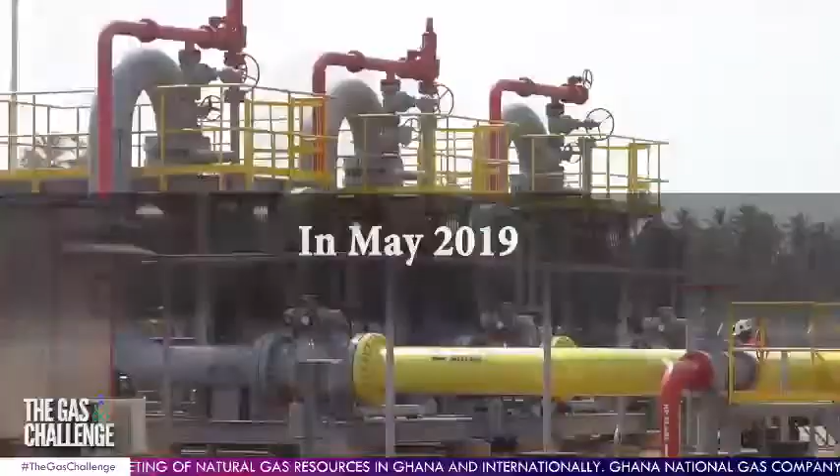In May 2019, the Government Relations Department of the Ghana Gas Company birthed an initiative that would ignite minds and fuel competitions. This is the Gas Challenge, a pioneering production designed to deepen the engagement and knowledge of Ghana's energy sector. The very first edition, dubbed the Stakeholder Edition, brought together key players in the gas industry. Institutions like the Ministry of Energy, the Energy Commission, the National Petroleum Authority, and even the Daily Graphic took part in the friendly but fierce competition. It was a battle of wits and knowledge, where the Ministry of Energy ultimately emerged victorious.

In 2019, the challenge evolved. The student edition was launched, pitting some of Ghana's top universities against each other. Universities offering courses related to the gas industry, such as the University of Ghana, Kwame Nkrumah University of Science and Technology, University of Mines and Technology, and others, faced off in an intellectually charged atmosphere.

This was no ordinary competition. It was a battle for supremacy in the energy sector. The competition, held across 3 major regions, Greater Accra, Kumasi, and the Western region, saw the University of Mines and Technology, UMAT, clinch the title in the very first student edition. For 3 consecutive years, UMAT would continue their reign, proving their dominance in the field of energy education.

But the Gas Challenge didn't stop there. It grew. New institutions like Ho Technical University, Kumasi Technical University, and Tamale Technical University joined, bringing the total number of competing universities to 12. The competition became tougher, the stakes higher. And then, after years of dominance, the unthinkable happened. In a dramatic turn, KNUST dethroned UMAT, marking a new era in the Gas Challenge's storied history.

Now, we start with the LPG commercial utilization options and their likely demand centers within Ghana's energy market. LPG can be used for domestic and commercial cooking and heating. In fact, it is a preferred choice when it comes to cooking because it provides a cleaner and more efficient alternative as compared to traditional fuel like charcoal and firewood. LPG is preferred because of its quick heating and precise temperature control.

Now, it can be used in industry for combined heat and power, that is for ceramic production as well as glass production. LPG is used as autogas in transportation and also for power generation where it is uneconomical to supply natural gas or lean gas by constructing a pipeline.

Now for pentane. Pentane is not commercialized yet. That means that to commercialize pentane, you are supposed to perform what is called economic analysis to check the product or the project's viability. This analysis will consider the capital expenditure, operating expenses, the net present value, and also the profitability index. If upon the analysis you realize that it is commercially or economically viable, then you can commercialize the pentane. Now, when it is commercialized, we can use pentane for power generation.

We can also use pentane as feedstock in the production of polymers and plastic. It can be used for plastic production as well as fertilizer production to minimize the environmental impact caused by flaring. Pentane can be used, just like the LPG, as autogas for transportation.

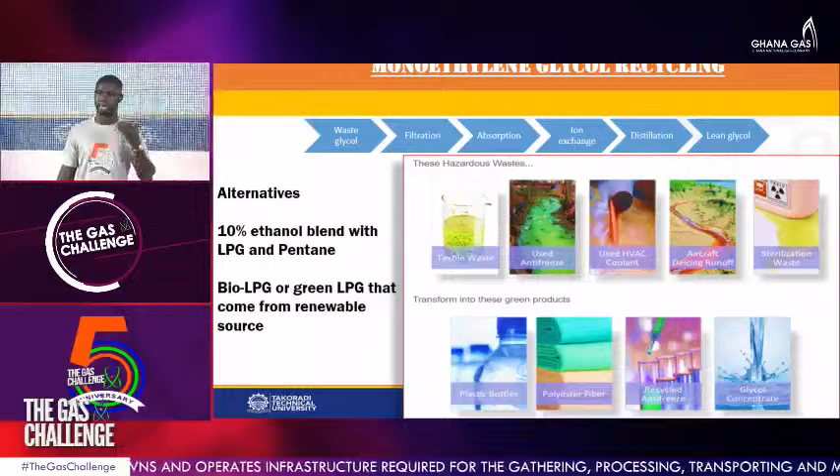Now, the waste glycol that is obtained after the processing of the gas can be put to use. To purify the glycol, we have to go through 5 major stages. First, the waste glycol undergoes filtration, whereby particles in the glycol are removed up to 25 microns. Then, the glycol is also contaminated by the presence of oxalic acid and glycolic acid, so you remove the acid from it by absorption. Then later on, you have the ion exchange.

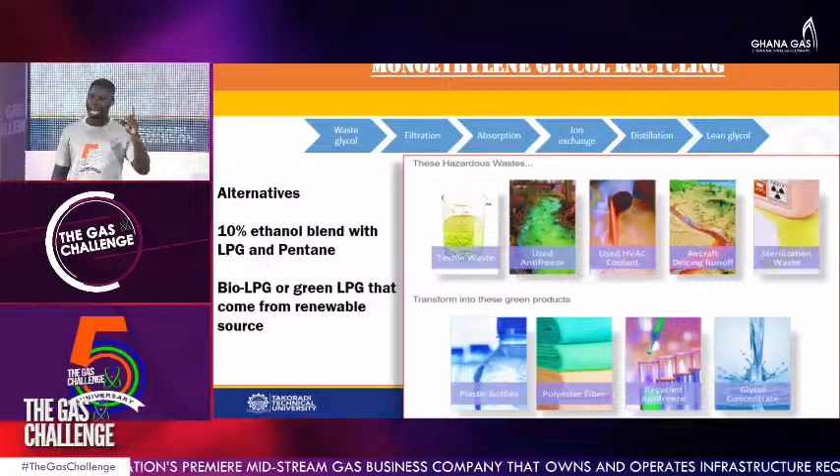The glycol also becomes polluted because it reacts with divalent ions such as calcium ion and iron ion. So this is removed using a fixed bed media. And finally, distillation to take away the water from the glycol.

Now you have a lean glycol. You can have 2 options. One, to turn this lean glycol into ethanol. One may ask why - because turning this into ethanol is in line with SDG Goal 7, that by 2030, you are going to add 10% ethanol to all petroleum products.

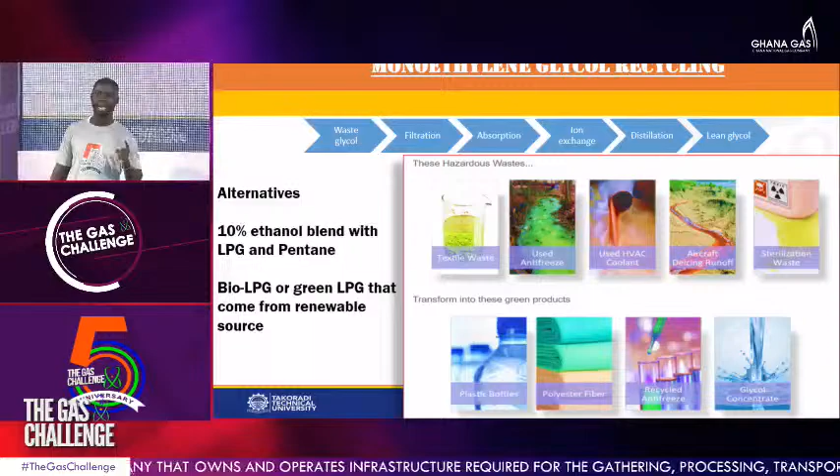Now, when we add ethanol to the LPG and pentane, it is going to increase their burning efficiency and also release less CO2 into the atmosphere. Or, you can recycle this waste glycol together with other waste, such as agricultural waste, to get what is called bio-LPG, which is a renewable option.

Now, from the diagram, you can see the ones above are the hazardous waste glycol, and the ones below are the transformed ones. So you can have plastic bottles, polyester fiber, recycled antifreeze, and glycol concentrates.

Now, it is important to know that when you recycle the glycol and also put the pentane into commercialization, we are killing two birds with one stone, because not only are we protecting the environment, we are also creating jobs to generate income.

Now, let's look at the nature of the demand centers and assess the demand and supply balances. The demand centers range from domestic homes, commercial centers, automobile stations, and industrial zones. So you can have two types of demand centers: high demand centers and low demand centers.

This demarcation or category is influenced by the following factors: population density, urbanization rate, infrastructure development, affordability, distance, and safety issue.

If you take a high demand center, they have high population density and high urbanization rates due to the intense economic, commercial, and industrial activities in the area. They also have several infrastructure for LPG, and they can afford to buy the LPG because of high standard of living.

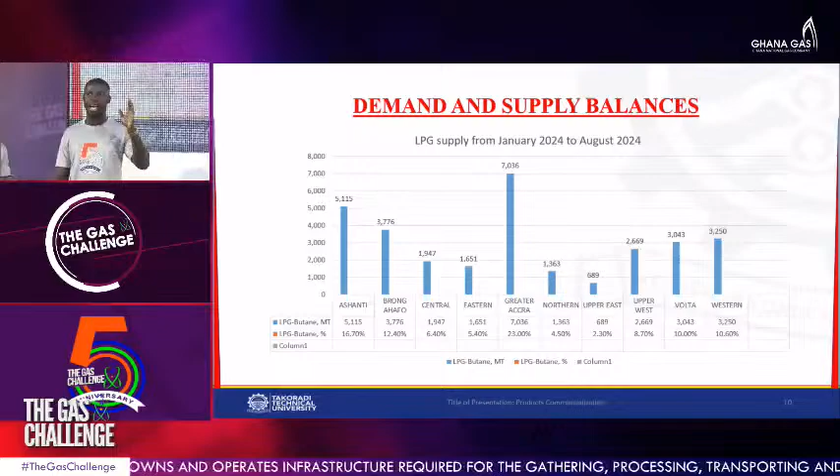Now, to be able to assess the demand and supply balances, you cannot go further than the regulator, which is the NPA. So you went to the NPA website and got data from January to August 2024 to know the supply of LPG across the 16 regions of Ghana.

From the data, you realize that Greater Accra has the highest demand and supply of LPG, followed by Kumasi, that is the Ashanti region, followed by Brong-Ahafo. All of these regions are located in the southern part of Ghana, with the least being the northern part of Ghana and then Upper East.

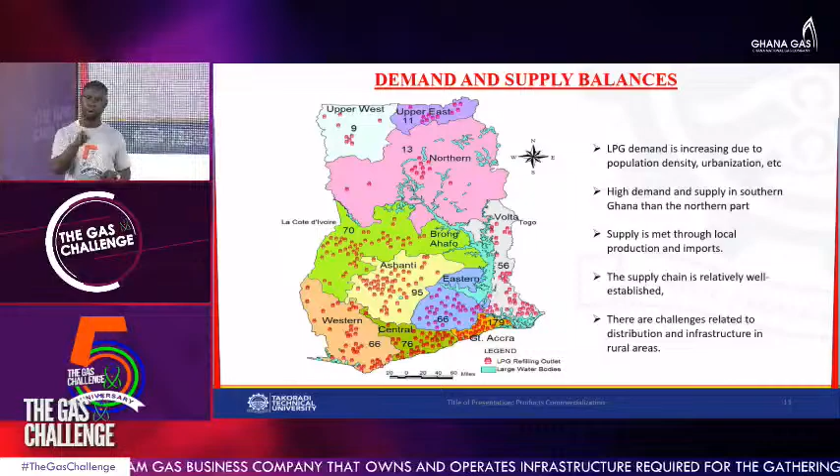Again, a survey was conducted by the Ministry of Energy in 2017 after the Atomic incident. From the survey, we had 641 LPG refilling stations in Ghana, and this record still held in 2022.

From the survey, the one in red in the legend represents LPG refilling stations or outlets. Most of these outlets are located in the southern part of Ghana, with Accra having the highest, followed by Kumasi. As of May 2024, we had about 750 LPG outlets in Ghana.

So because the supply is very less compared to demand, you import more LPG from outside, that is importation, because the one you are producing in Ghana cannot meet the demand of Ghanaians.

Now, the pricing method. For LPG, we adopted import parity pricing as the best pricing mechanism. Why? Because import parity pricing ensures that locally produced LPG at the GPP is priced to reflect global supply and demand dynamics by benchmarking it against the Argus international price, which makes the pricing structure more competitive and fair.

Again, it provides transparency, which helps to know the actual value of LPG in the market for risk assessment and also for trading purposes.

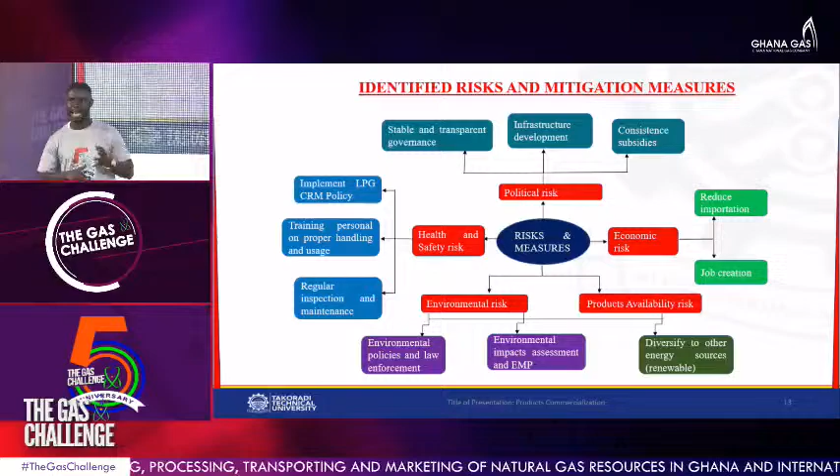Then we have various risks and their measures linked to the use of LPG and pentane. We have political risks such as subsidy removal, poor governance, and corruption. This can impact the infrastructure in Ghana and make it hard for those in rural areas to have access to LPG. You also have economic risk, such as inflation, which can increase the cost of raw materials and impact their affordability.

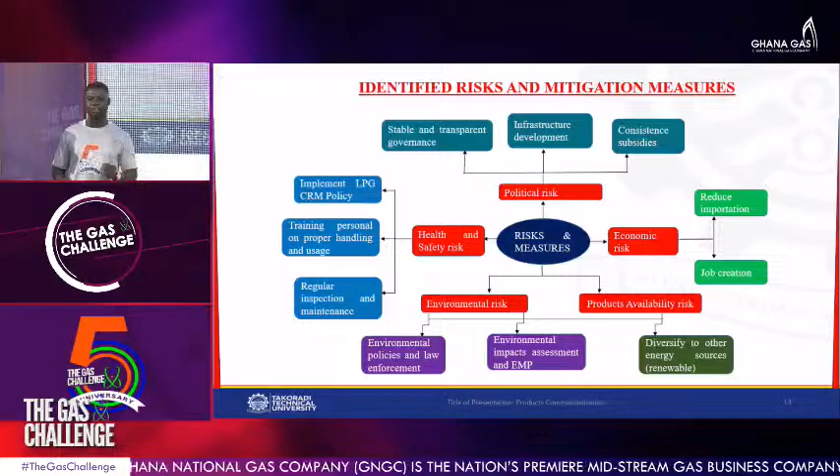We have product availability risk. When LPG or pentane become more scarce, it will let Ghanaians revert to the use of charcoal and wood fuel, which has several implications, including health implications.

Then you have environmental risk. When pentane is released or spilled into the environment due to improper handling, it can cause aquatic and terrestrial ecosystem issues. Then you also have health and safety risk.

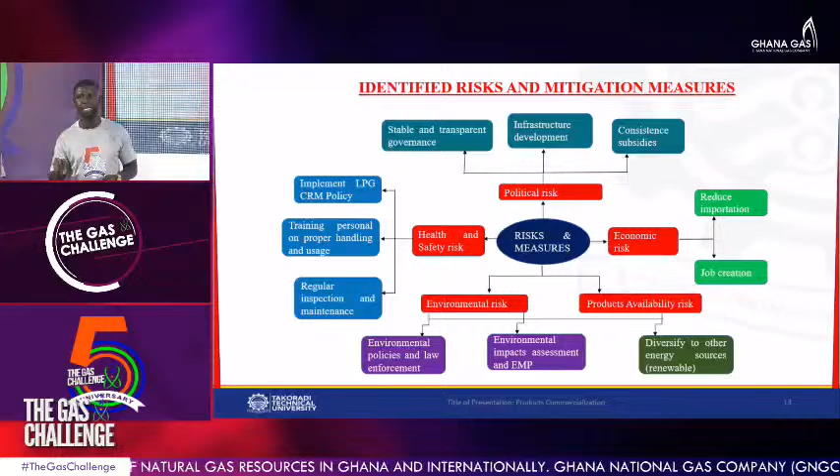The potential hazard linked to the use of LPG is fire and explosion. A typical example is what happened in 2017 at the Atomic Junction, leading to a large-scale explosion, claiming lives. May their souls rest in peace.

Now, to mitigate all this, we can put the measures into 4 categories. First, there should be stable governance, diversification to other sources of energy, and implementation of the LPG cylinder recirculation model.

Moving on, we were able to project the revenue for a half year period, and we had a whopping sum of about $54 million.

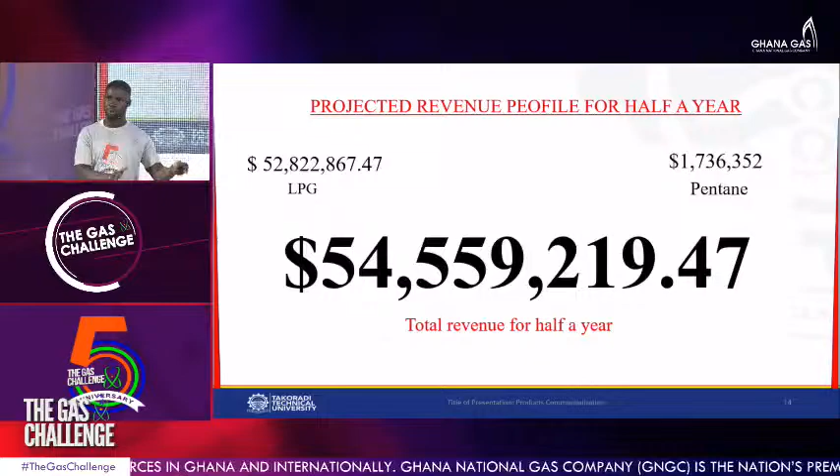You use this one, you take the data from the NPA, that is the Argus average price. For LPG, it is found by using the biweekly Argus price. That's the first window and the second window. The first window is 1st to 15th, second window is from 16th to 31st. So to find the Argus price of the first window, it depends on the Argus average of the 12th to 26th of the month, and the second window depends on the 27th of the previous month to the 11th of the current month.

You went to the NPA website to get all the indicative prices of LPG, and then you got this value. Now one may ask, are the various usages of LPG and pentane optimal? Yes, because LPG is a cleaner and more efficient fuel. It is economically attractive, meaning it has a high profit margin. It is also cost effective, especially when used for transportation, and it is in line with SDG Goal 7.

You perform an environmental impact assessment and realize that LPG and pentane are more efficient, cleaner, reduce emissions, and also protect forest reserves.

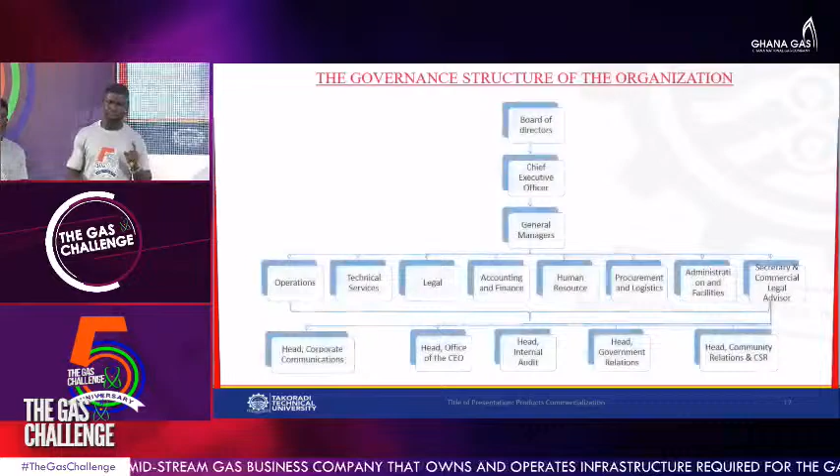And if our outfit represents an organization, this will be our ideal governance structure. You have the board of directors, then the CEO, then the general managers of operations, technical service, legal, and the rest. Then you have the various heads.

So in conclusion, all we are saying is that LPG is a cleaner and more efficient fuel. It is an energy source for the transition, because it is in line with SDG goals 3, 5, 7, 13, and 15. We recommend that glycol should be recycled, that ethanol blending be made essential, that the public be educated on how to use LPG appropriately, and that pentane also be commercialized.

We also urge the government to ensure there is intensity in the rural LPG promotion policy. And finally, LPG also protects our forest reserve. Remember that when the last tree dies, the last man also dies. Thank you very much.

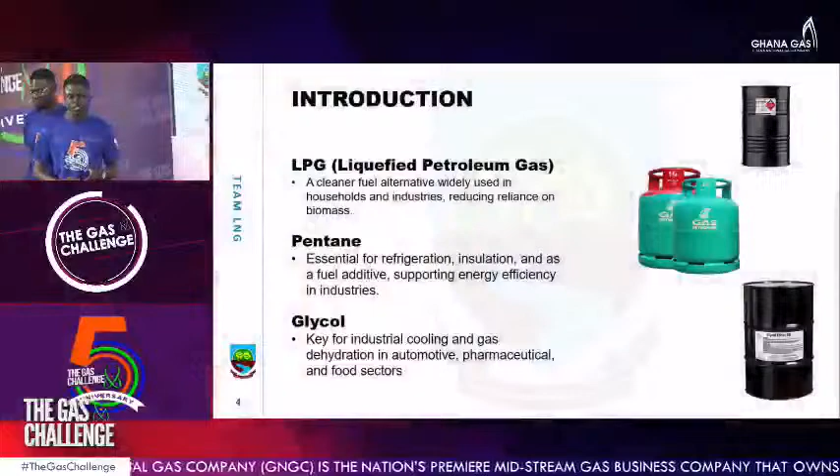So LPG is one of the products produced from the processing of natural gas. Pentane is also one of the products produced from the processing of natural gas. Glycol is one of the chemical substances added to natural gas during its processing.

So the demand centers for LPG. During our research, we found out that Accra is one of the largest LPG consumers due to its urban lifestyle. Kumasi is also significant for LPG utilization across households, for cooking and heating purposes. Tema, a heavy industrial area in our country, has a high demand for LPG for industrial and residential needs. Takoradi, as a result of its proximity to natural gas resources, has a high demand for LPG for cooking and residential purposes. Other smaller towns like Obuasi and Akrokeri have high LPG demand, though limited by infrastructure challenges.

Supply and demand balance. The supply of LPG is limited by reduced local production, leading to heavy reliance on imported LPG. Import dependency creates vulnerabilities due to price fluctuations and supply disruptions. As a result of industrialization and population growth in the country, there is a high demand for LPG.

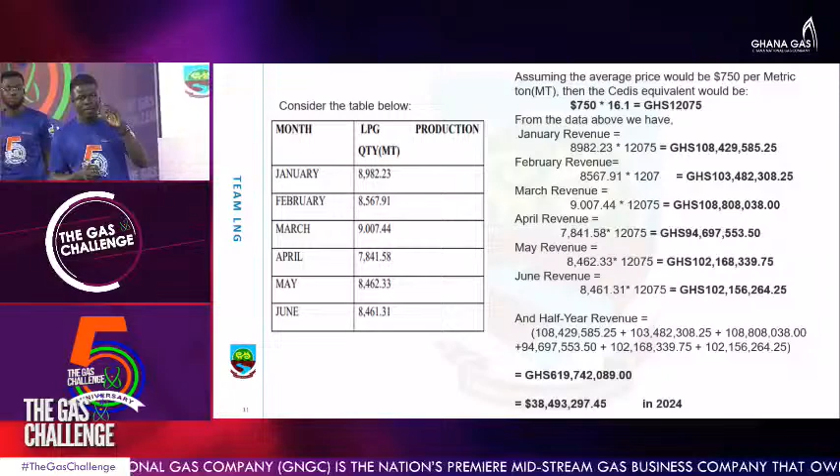During our research, we found out that the price per metric ton of LPG is $750 per metric ton of LPG. So if we are to convert this amount into Ghana cedis, during our research, the conversion factor was $1 US dollar is equal to 16.1 Ghana cedis.

Meaning that the metric ton of LPG will cost 12,075 Ghana cedis. Hence, multiplying this monetary value by the amount of LPG produced in this month gave us a total of 619,742,089 Ghana cedis.

So this is the revenue profile for the LPG utilization in Ghana.

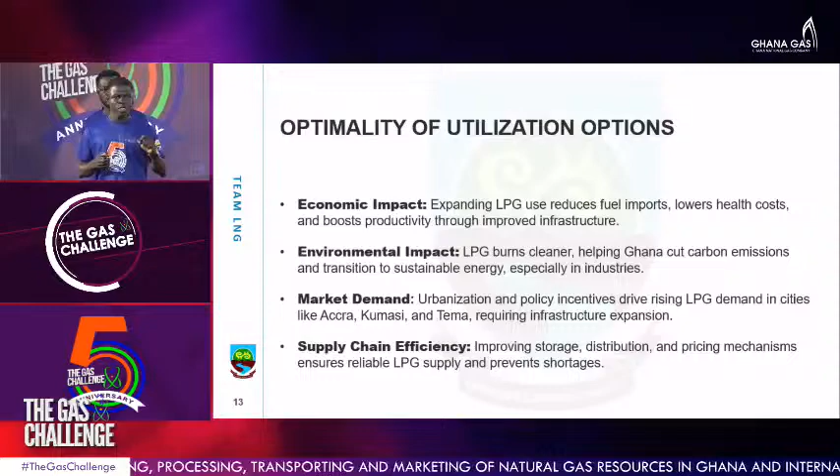Optimality of utilization options: we believe that adopting LPG as a cooking fuel and also as a vehicle fuel, that's auto gas, will impact our economy. It will also have an environmental impact in the sense that the use of LPG as a vehicle fuel will lead to the production of low CO2, thereby helping Ghana reduce its environmental footprint.

Market demand: there is a high demand for LPG, hence the need to put in place measures that will ensure sustainable local production of LPG in order to meet this demand.

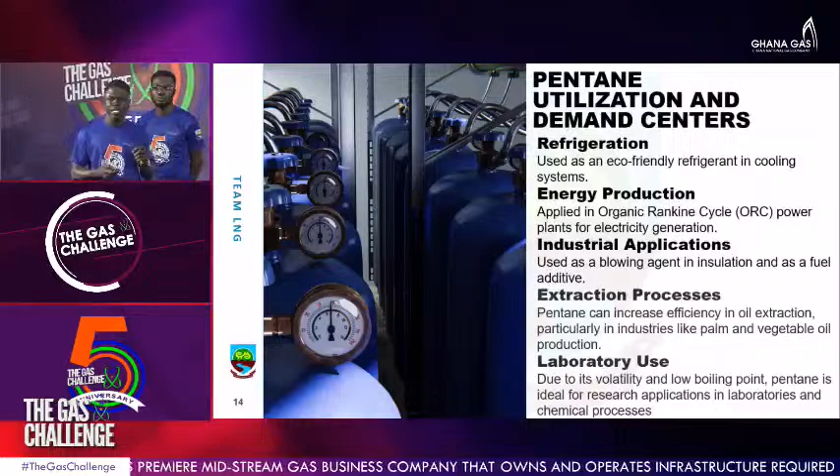Pentane utilization and demand centers. We've realized, or it was given to us, that Ghana Gas currently flares about 2,400 cubic meters of isopentane at their station. So if we are to convert the monetary value of this isopentane, we realize that about...

This can be done by the installation of an organic Rankine cycle, which will tap low heat energy from geothermal energy and convert it into vapor. This vapor will expand in a turbine to provide mechanical energy, and this mechanical energy will be converted to electrical energy by a generator.

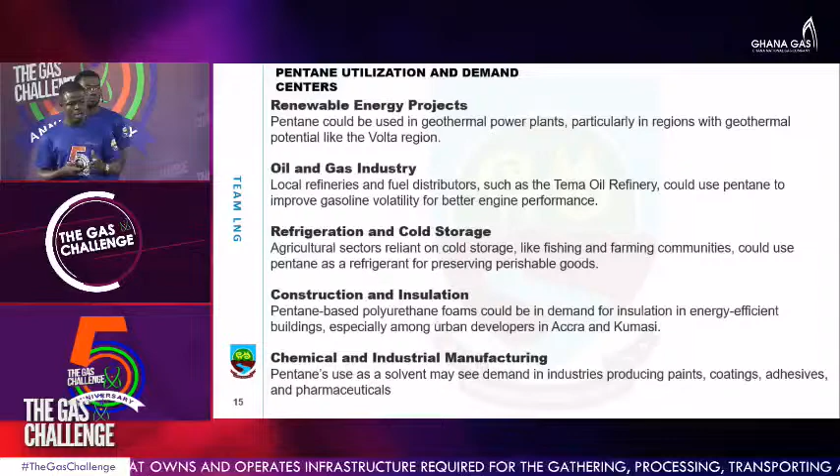Oil and gas industry utilization: local refineries like the Tema Oil Refinery can use pentane to improve gasoline volatility for better engine performance, refrigeration, and cold storage. Agricultural sectors can use pentane to cool or preserve their products.

Thereby helping to expand the life cycle of their products.

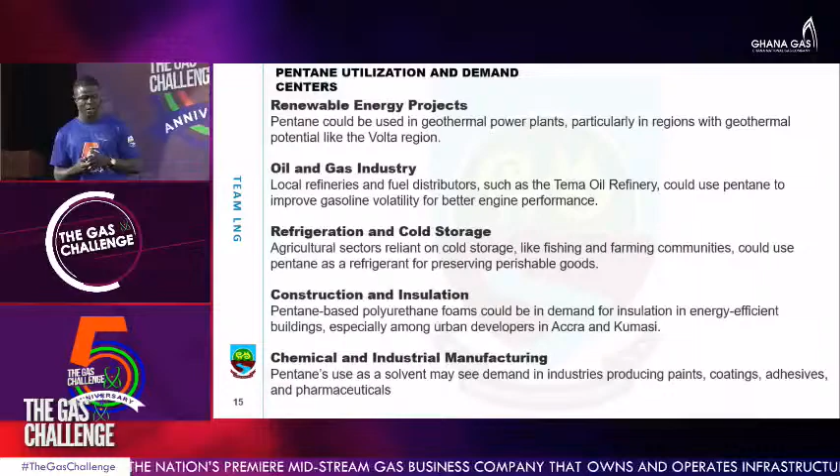Construction and insulation: pentane-based polyurethane foams could be used in demand for insulation in energy-efficient buildings, especially among urban developers in Accra and Kumasi. Chemical and industrial manufacturing.

Pentane as a solvent may see demand in the production of paints, coatings, adhesives, and pharmaceutical drugs like anesthetic drugs.

So the pricing mechanism for pentane: we adopted the cost-plus pricing mechanism because when pentane is produced in the country, the amount that will be paid for its utilization will not be the same as the amount that will be paid when pentane is imported into the country.

So the cost-plus pricing mechanism will ensure an efficient pricing mechanism for pentane when used in the country and also when it is imported into the country.

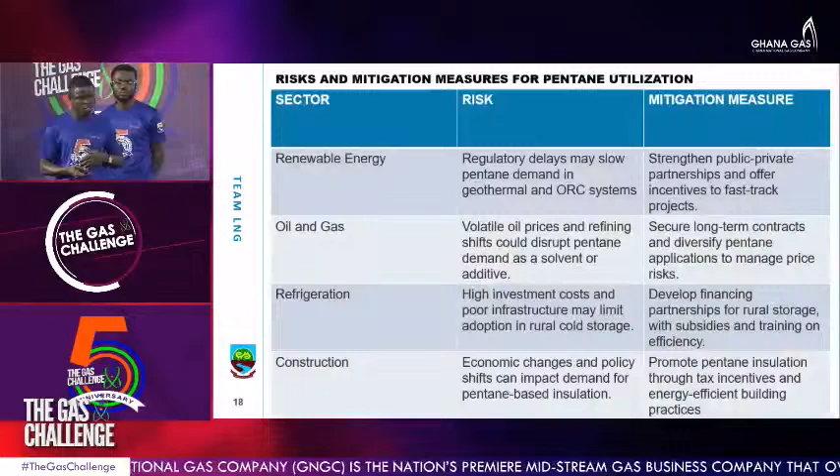So the risks associated with the utilization of pentane include renewable energy. Regulatory delays may slow pentane demand in geothermal and organic Rankine cycles. Hence, the need to strengthen public-private partnerships and offer incentives in order to fast-track projects.

For the oil and gas industry, we have to secure long-term contracts and diversify pentane applications to manage price risk. For refrigeration, we need developing partnerships for rural storage with subsidies and training on efficiency. For construction, we should promote pentane insulation through tax incentives and energy-efficient practices.

You have 5 minutes more.

Thank you. So the monetary value for pentane is given as follows. The revenue generated from the utilization of pentane is $11,401.56 US. Therefore, for a half year, the amount of money that will be generated from the utilization of pentane is $2,063,682.36 US.

Glycol utilization. In the problem statement, we realize that the waste glycol, we have to dispose it or find a way to commercialize it. So in the disposal of waste glycol, we have to ensure that we treat it by a process called bioremediation, in which we employ biodegradable enzymes to break down the waste glycol into less harmful waste, thereby reducing the impact on the environment when disposed. Also, in cases where we are able to reclaim the glycol, we can use it in many processes, thus we can use the glycol in the dehydration process.

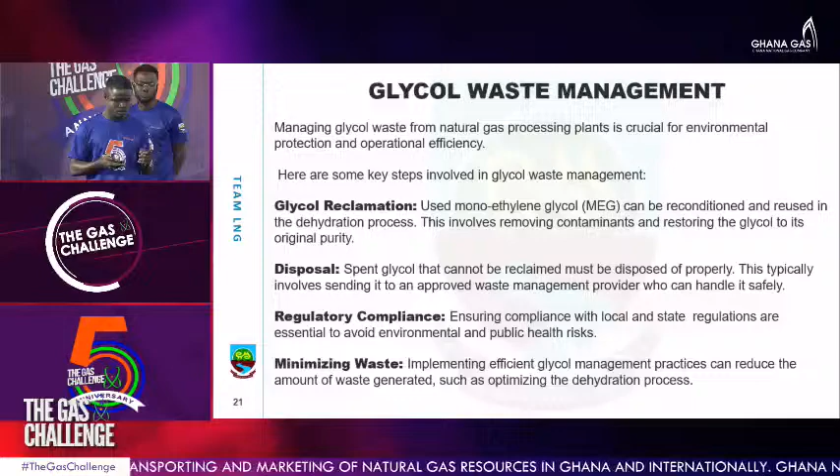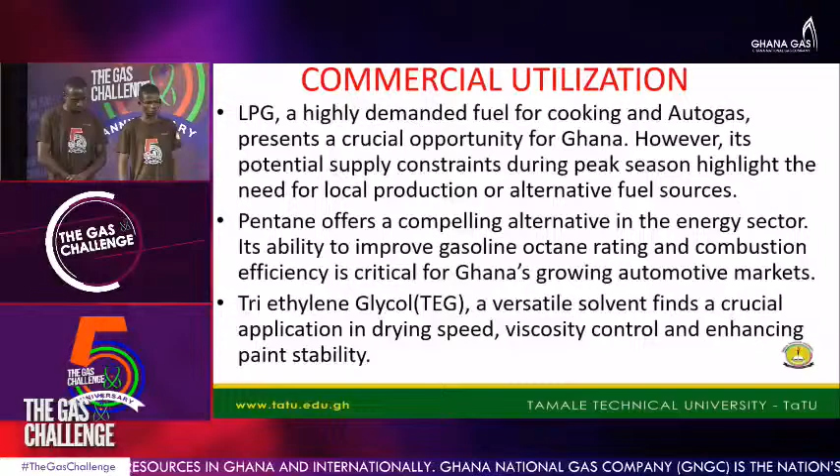Triethylene glycol finds a crucial application in drying and viscosity control and enhancing paint stability.

We move to the demand for liquefied petroleum gas, LPG. LPG emerges as a powerful source for the energy sector. It's used to power vehicles and offers a cleaner and more cost-effective alternative to traditional gasoline and diesel engines, particularly in urban areas battling air pollution. We also have LPG stoves, which provide a convenient and efficient cooking solution, promoting energy saving and reducing reliance on electricity.

LPG is an ideal candidate for expanding infrastructure like hotels, hospitals, and educational institutions.

Pentane presents a unique opportunity for industrial heating applications, particularly in specialized engines like the TM2500 gas turbine for backup generation in off-grid areas.

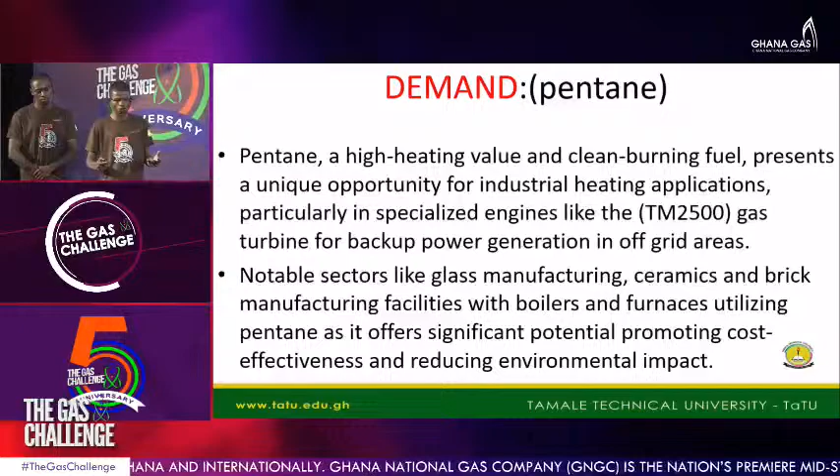Notable sectors like glass manufacturing, ceramics, and bricks manufacturing with boilers and furnaces utilize pentane, as it offers significant potential, promoting cost-effectiveness and reducing environmental impacts.

We have the pricing strategies. We recommend a pricing strategy that leverages the international Aramco pricing for butane. This benchmark serves as a strong reference point, reflecting global market trends, and provides a foundation for local adjustments.

By fostering markets, these conditions include the transportation cost, the cost involved in transporting the gas, the distribution cost, and we also speak of the potential subsidies. This pricing method ensures a competitive and transparent system, fostering market confidence and attracting investments.

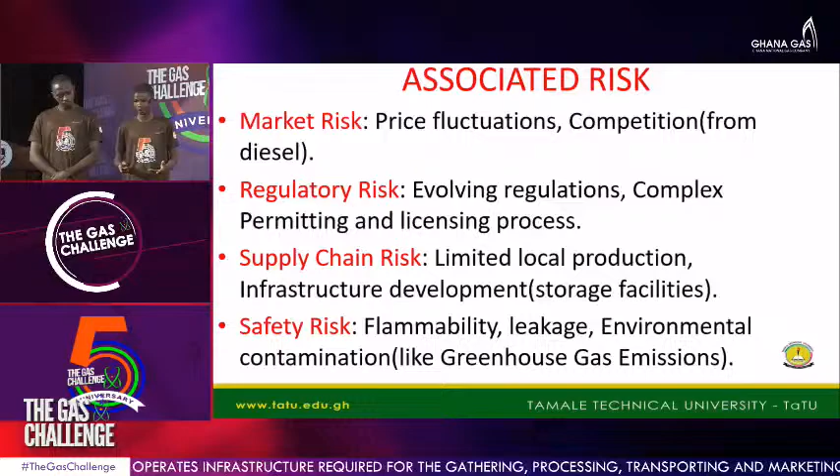In transporting the gas, what are some of the associated risks we'll encounter? We can speak of the market risks, price fluctuations. We can speak of competition from other sources of gas, or diesel. Then we can also speak of the regulatory risks: evolving regulations, complex permitting and licensing processes.

We can also speak of the supply chain risks: limited local production, infrastructure development, storage facilities. We speak of the safety risks, which include flammability, leakage, and environmental contamination like greenhouse gas emissions.

So what are some of the mitigation measures we can put in place to minimize this? We speak of market diversification. We should try to expand the markets beyond the agricultural sector to make sure that people are able to invest, not just only focus on the agricultural sector. Incentive programs like tax breaks, subsidies to encourage adoption, and investing in storage and transportation infrastructure.

Then we should have market education. We can all attest to the fact that the reason why we are all seated here is because of Ghana Gas. And so far as we are seated here, it's a way of marketing Ghana Gas.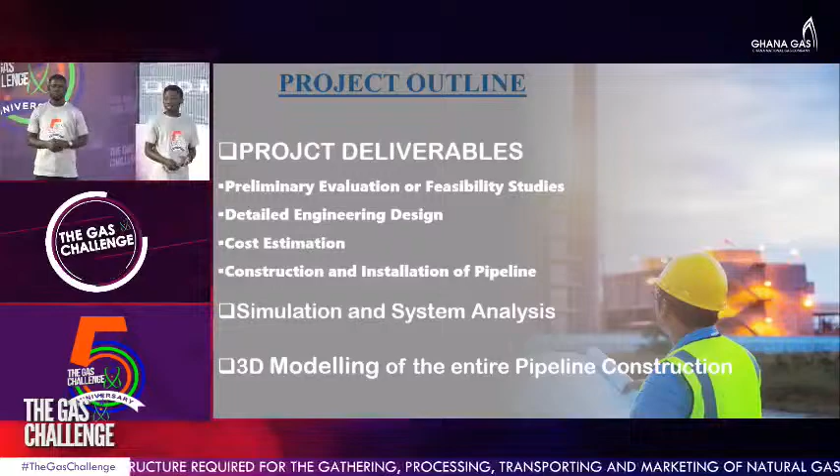Our pipeline construction has generally been categorized into the following stages: preliminary evaluation or feasibility studies, detailed engineering design, cost estimation, and construction and installation of the pipeline. Attached to this presentation we also have a simulation and system analysis of the system and a 3D modeling of the overall pipeline construction.

Preliminary evaluation is a stage where we conduct an in-depth study of all relevant and available data. Some of this data includes topographical maps, which give us an overview of all areas where the pipeline traverses, or the project area. We also have geotechnical or geological surveys, which give us an understanding of the subsurface formation and the different types of soil formations we'll encounter in the pipeline construction.

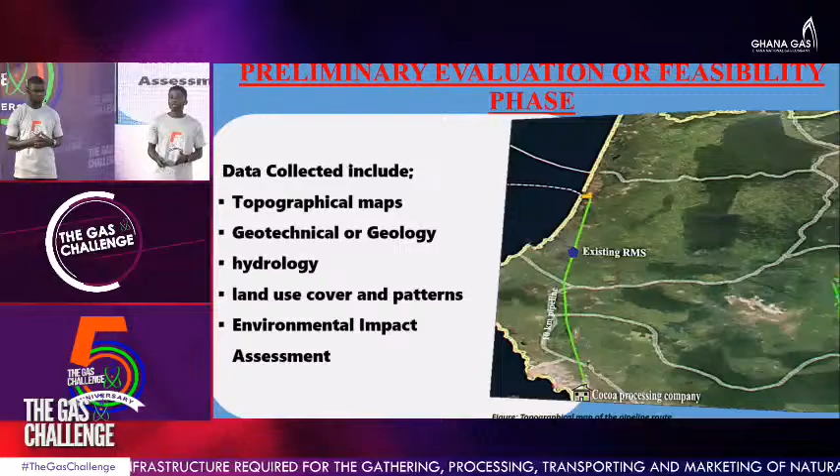We look at the acidity and basicity of the soils across different terrains. We also consider hydrology - since the pipeline passes through river sections, we have to know the water quality, depth, and width of the water section. That would influence the type of crossing technology to be used.

We have land use cover and patterns - there are specific areas where activities go on within the community, and you have to consider all those factors. We also have environmental and social impact assessment, which is conducted to know the impact of the project on the people within the community.

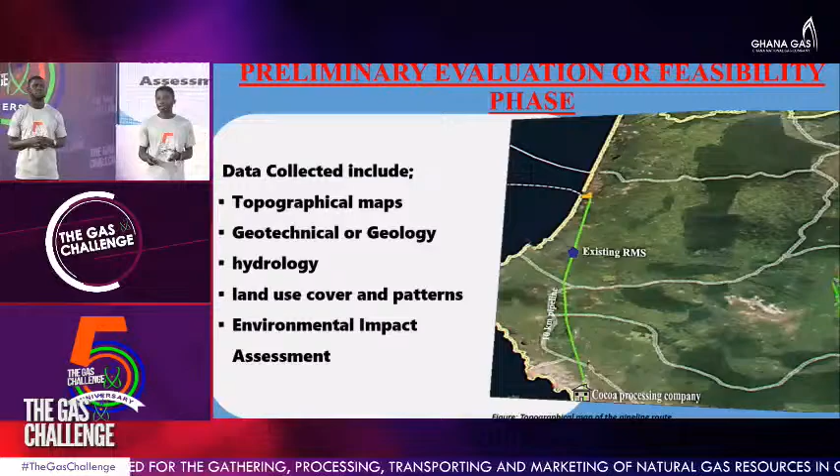Based on the assessment of all this collated data, if a positive prospect is found in terms of economic and technical aspects, we move on to the detailed engineering design, where we establish the appropriate pipe material to be used for construction. We look at the pipe diameter and thickness to accommodate the projected flow, the design pressure, and the stresses or loads subjected on the pipeline. We also look at the optimum pipeline routing, install control devices and monitoring systems for maintenance and control of the fluid, and consider jointing or welding methods to be used on the pipeline.

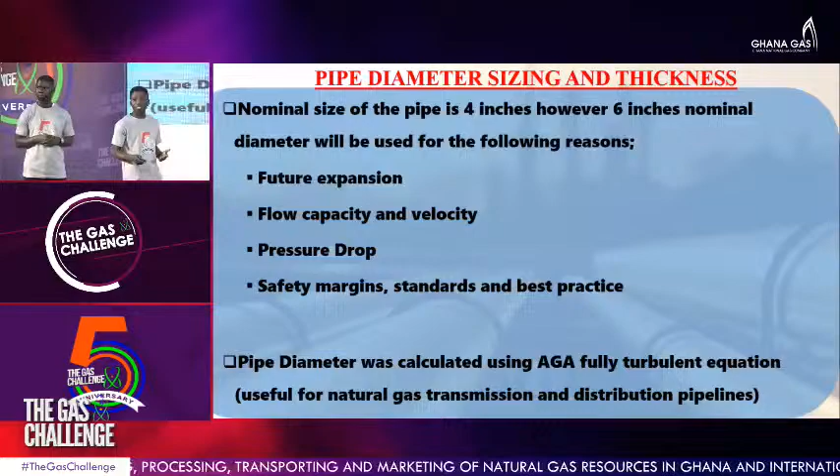Using the AGA equation, a 4-inch diameter pipeline was calculated. However, a 6-inch diameter pipeline was used for the following reasons: future expansion, flow capacity and velocity, pressure drop, and safety margins, standards, and best practices. A corresponding wall thickness of 0.280 inch was obtained, and the design pressure was calculated using Barlow's formula, giving us 2197 psi as the design pressure.

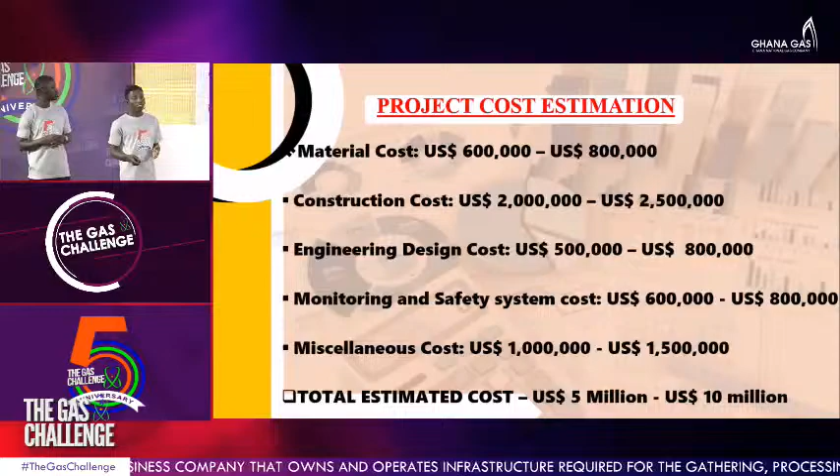Now, after establishing this, we move on to our cost estimation in order to ensure that our initial capital cost is within budget. Our total estimated budget for the project is between $5 million USD to $10 million USD, considering material cost, construction cost, engineering cost, monitoring, and miscellaneous cost.

Now, after our estimation of the cost, we look into procuring all the necessary materials and equipment for the construction activities. From there, we move on to the actual pipeline construction and installation.

Now, the first stage here is the right-of-way preparation and construction. However, prior to this stage, we look into obtaining permits and approvals from all regulatory bodies and government agencies, and also acquiring the easement of right-of-way access from landowners and local agencies as well.

And then we move on to the right-of-way preparation. We flag the boundaries of all areas where construction activities will take place, and then we clear the place strategically, locating the storage and staging areas where construction equipment will be stored.

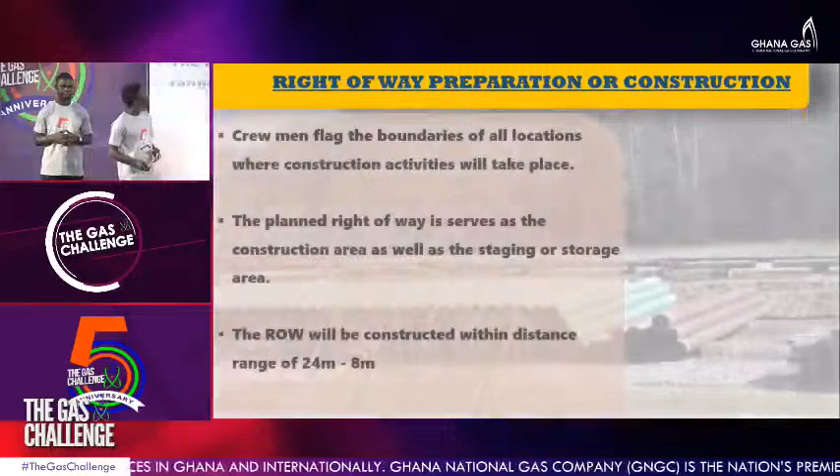After this equipment for construction has been made available within the construction area, the next stage, which is the trenching and padding process, begins. So the majority of the pipeline will be constructed using the conventional method, which is the open cut method. This method basically involves a trench being dug and a pipeline being laid within the trench.

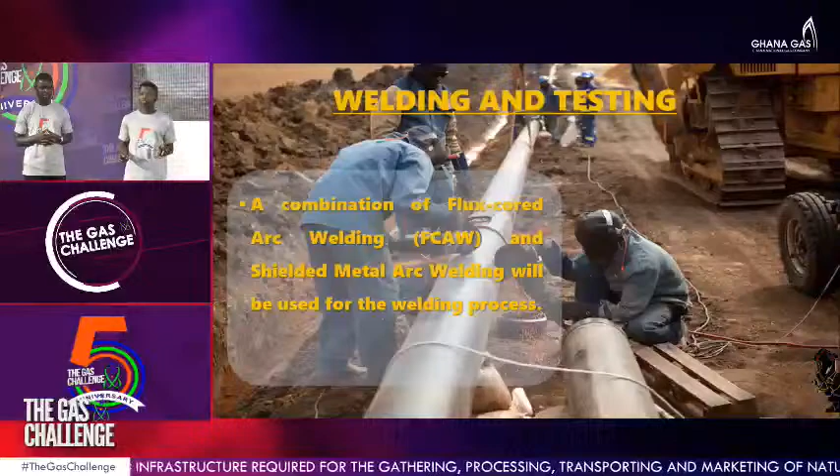Now, after the trench is dug, we go to the storage area, and then pre-coated sections of the pipe are transported to the right-of-way. They are stringed above ground along the dug trench, and then from there, we look at various welding technologies or methodologies that will be used to weld the various sections of the pipeline together.

Now, in this presentation, we looked at flux-cored arc welding and shielded metal arc welding. So these are the two methods we adopted. With flux-cored arc welding, it uses a continuously fed tubular wire filled with flux. And with shielded metal arc welding, it uses a consumable electrode coated in flux and a metal shield to weld and coat the pipe piece.

Now, after the welding operations, we need to conduct a test to ensure that the welding is within safety and standards. The testing of the pipeline will be conducted using the principles of the standard code API 1104. In our construction, we used 3 major non-destructive testing technologies: visual inspection, ultrasonic testing, and radiographic testing.

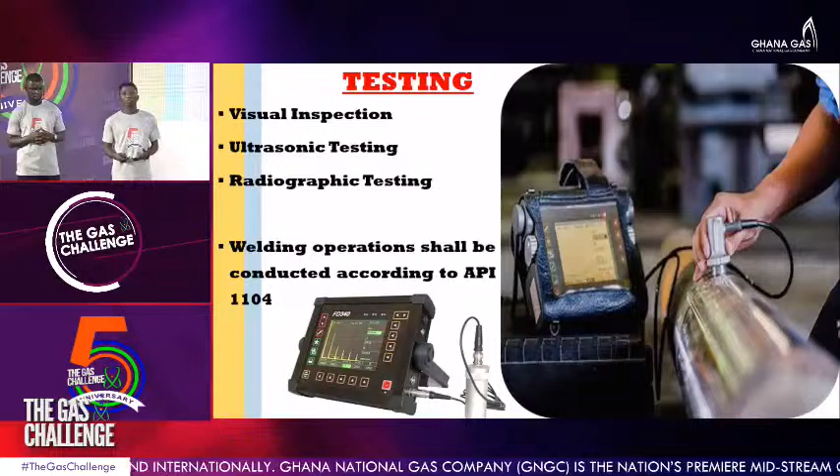With visual inspection, a certified engineer visually observes the various welds to see there are no defects on the pipeline. Moving on to ultrasonic testing, where a high-frequency sound wave is used to detect the thickness of the pipe as well as to ensure that there are no defects on the pipeline.

And then we also have radiographic testing, which uses X-rays and gamma rays to create internal images of the pipeline to ensure that there are no defects or flaws, and also to ensure that the pipeline doesn't encounter any concavity.

Now, the pipeline will be protected from external corrosion using an anti-corrosion protective method, which is the trilaminate copolymer polyolefin coating, also known as the 3-layer polyethylene coating. In this method, we have the fusion bonded epoxy primer as the first layer, the copolymer adhesive as the second layer, and finally the polyethylene coating as the top coat.

Now, it will be supplemented by cathodic protection due to the fact that we have a corrosive environment within the pipeline area. A sacrificial anode will be used to protect the pipeline surface, and also an impressed current where a DC source will be directed to the pipeline to protect the pipeline surface from corrosion.

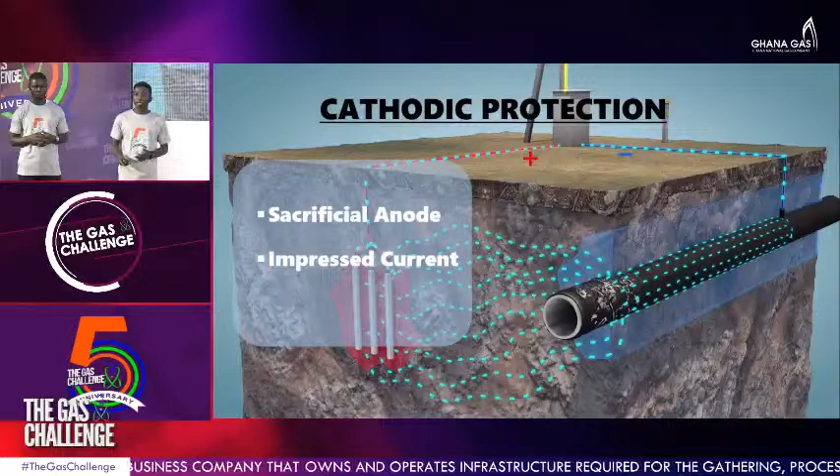Now, from there, we'll install some instrumentation and monitoring systems on the pipeline. We have flow meters, pressure transmitters and sensors, temperature sensors, leak and fire detection systems, and also valve installation.

And from here, we then lower our pipeline into the trench using side boom tractors. So the pipeline will be lowered into the trench, and then suitable excavated backfill materials will be used to cover it, and then compacted to prevent subsidence.

The next stage, we've now constructed our pipeline and then laid it. We need to conduct a test to ensure that the pipeline can operate to the optimum design pressure without any adverse effect or impact on the environment.

We adopted hydrostatic testing. In this process, we go through preparation and pressurization. For preparation, the pipeline surface is cleaned, and for pressurization, we obtain a water source and subject the pipeline to a pressure above its maximum operating pressure.

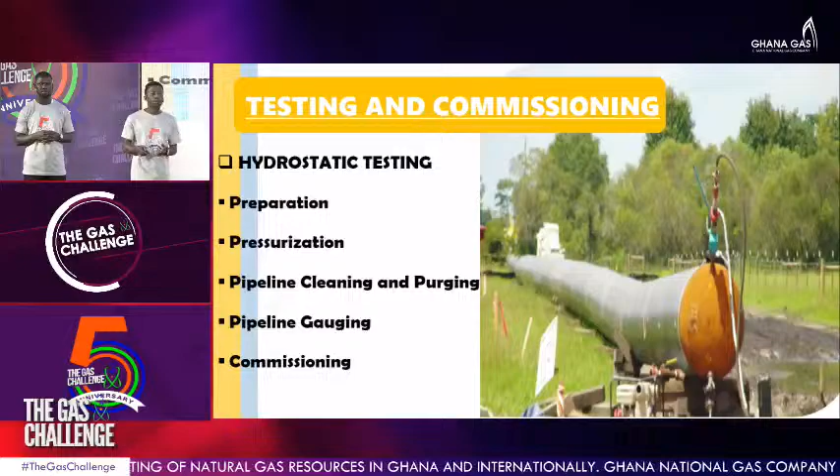According to ASME B31.8, pipeline traversing through a location of pipe class location 3 or 4 should be subjected to a pressure of 1.4 times their design pressure for a period of at least 8 to 24 hours. After this is conducted, we verify there are no defects or other adverse conditions on the pipeline.

We then bring out the water, clean the pipe, and purge it.

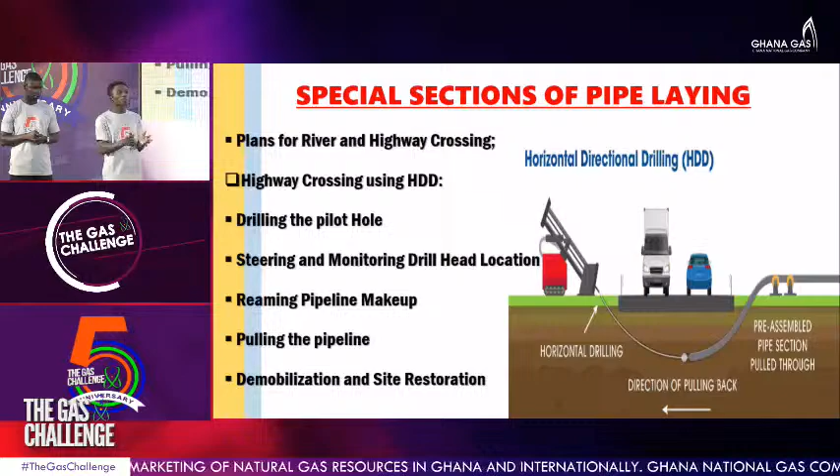There were special sections in our construction, including highways and rivers. On the river section, we encountered a deep section and a shallow section - two shallow sections and one deep section.

For the deep section and the highway section, we adopted horizontal directional drilling. This involves drilling a pilot hole, steering the drill head within the trajectory, and then reaming the conducted bore so that it meets the diameter of the pipeline. Then we pull the pipeline through, and finally demobilize all instruments and restore the site to its previous state.

On the river section, we use horizontal directional drilling for the deep river section, and open cut or isolated open trench for the shallow river section. With this, we also have site preparation.

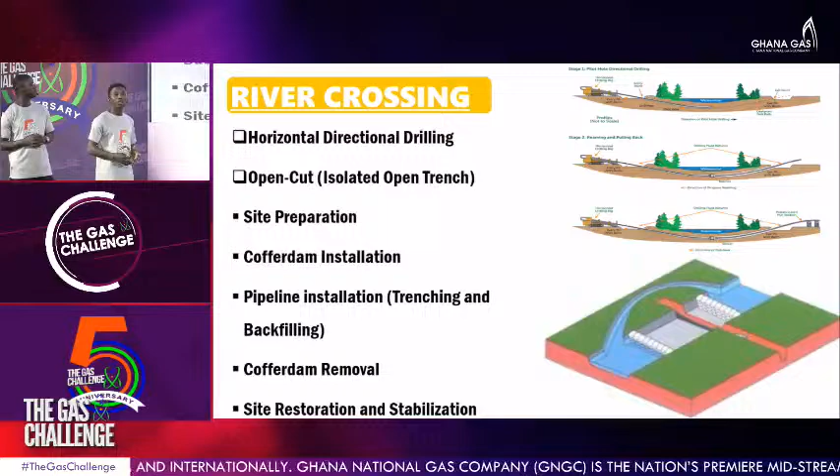We clear the area where we are going to do our construction, install all necessary equipment, and install coffer dams at the upstream and downstream sections of the river to obtain a clear path where our trench will then be dug. We lay our pipeline, then finally remove the coffer dams for the river to flow, and finally do site restoration and stabilization.

Afterwards, we conducted a simulation and system analysis of our pipeline, simulating flow efficiency, wall thickness, and average pressure.

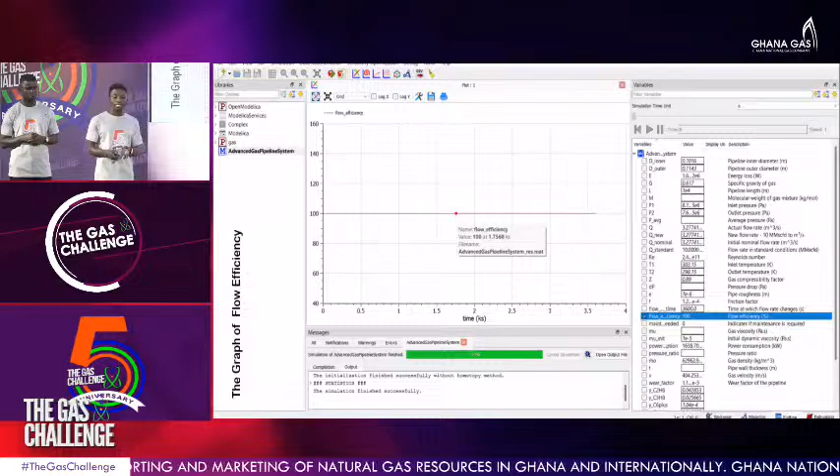This was conducted for a time period of 1 hour, and after that period we realized that the flow efficiency was 100% and was flowing at the end user requirement specification of 10 mmSCFD.

For the pipe wall thickness, we realized there were no significant changes as a result of design pressure or pressure subjection and stresses. Finally, the average pressure was within the specified range, which was also calculated.

We also did a 3D modeling of our entire pipeline construction. So now join me as I take you through the various stages we encountered in the pipeline construction. This was done using Autodesk Inventor, showing the various terrains the pipeline traverses.

The blue section is the river section, and we have the highway sections on top as well. We also have valves, flow meters, and sensors installed on the pipeline, and the densely populated area as well, all within the same system.

Finally, we designed a solar-powered monitoring device. This is an innovative technology we are trying to install on the pipeline to pick data on the various parameters of the flowing fluid.

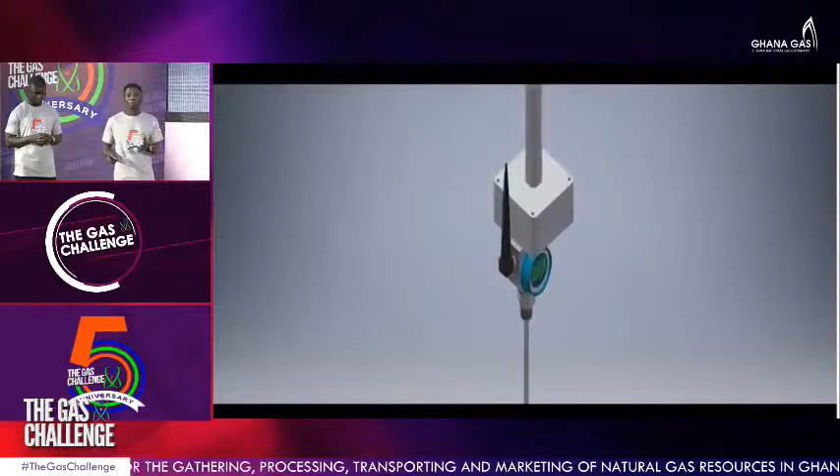We need to ensure that the pipeline or flowing fluid specification meets the end user requirement. This solar-powered monitoring device will pick the various parameters and ensure that they are within the limit we need. They will be installed at a distance of 4 kilometers apart.

In the construction of this device, we used a solar panel, a battery, a communication module, and sensors and transmitters installed as well.

The solar panel will trap energy from the sunlight, which will be used to power the system, and the batteries would have to be energized by the energy trapped from the sunlight.

There should be a communication between the central control room or the human-machine interface and this particular module we've created. We use sensors and transmitters to ensure that the flow parameters are transferred to the central control room, to ensure that they meet the end user's requirement. We also have solar panels and batteries that are used to energize the system. Thank you.

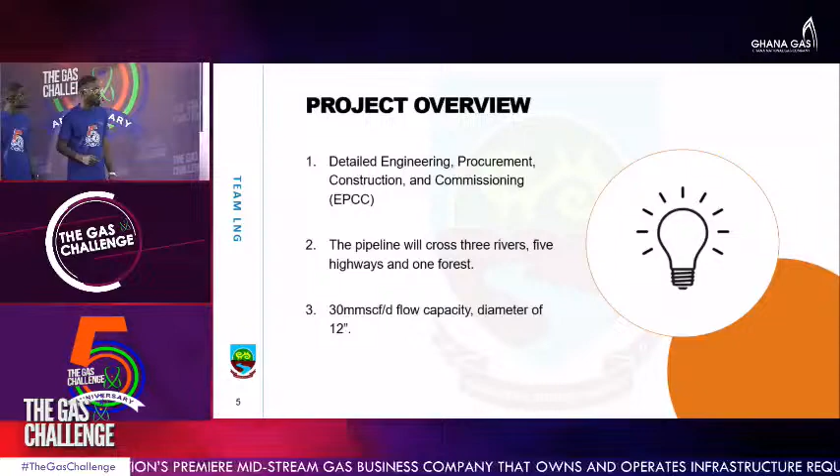This is the project overview. The project includes detailed engineering, procurement, construction, and commissioning, which will involve us coming out with a pipeline that is crossing 3 rivers, 5 highways, and also a forest. The pipeline is designed to have a flow capacity of 30 million standard cubic feet per day with a diameter of 12 inches. These are the procedures we went through in coming out with it.

These are the procedures we'll go through if we are awarded a contract to come out with a pipeline that will supply natural gas to Keda Cocoa Processing Plant. Number one is the survey and staking. This stage helps us to map the route of the selected terrain for our pipeline, and then we stake it in order to establish the exact location of our pipeline.

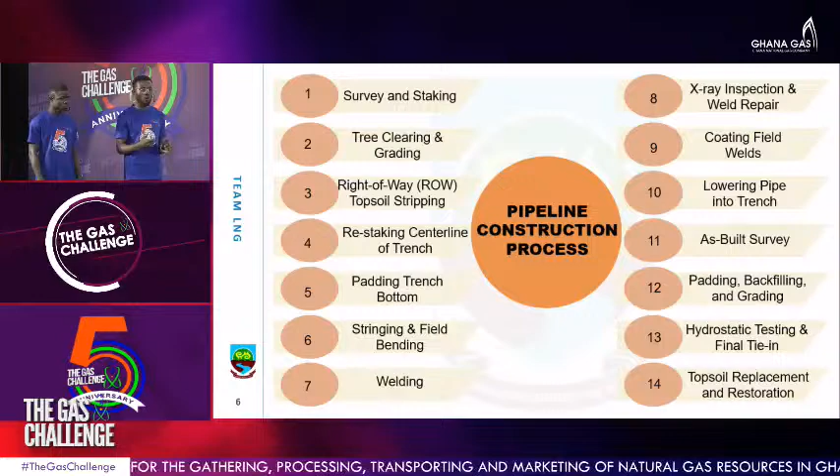After that, we do tree clearing and grading, whereby we level the ground. Even though it is a flat terrain, considering nature, you realize it wouldn't be as flat or smooth as we want, so we have to grade it. Then we consider what we call the right-of-way topsoil stripping. This is done in order to take the topsoil before we grade, so we won't degrade it but rather keep it, so that after we are done with the pipeline construction we will bring it back to restore the surface we disturbed and plant trees to ensure that surface regains its natural properties.

We have the restaking of the center line of trench. This step is done to ensure that after we are done with tree clearing, we still have the center line of our pipeline in place. We have padding of the trench bottom, which is done to prevent the pipeline from strong abrasions when we are lowering it to the trench.

We have stringing and field bending. After we are done with the padding, we string the pipeline along the route of the pipe—stringing means laying the pipes along the trench. After that, we bend where necessary, and then we weld.

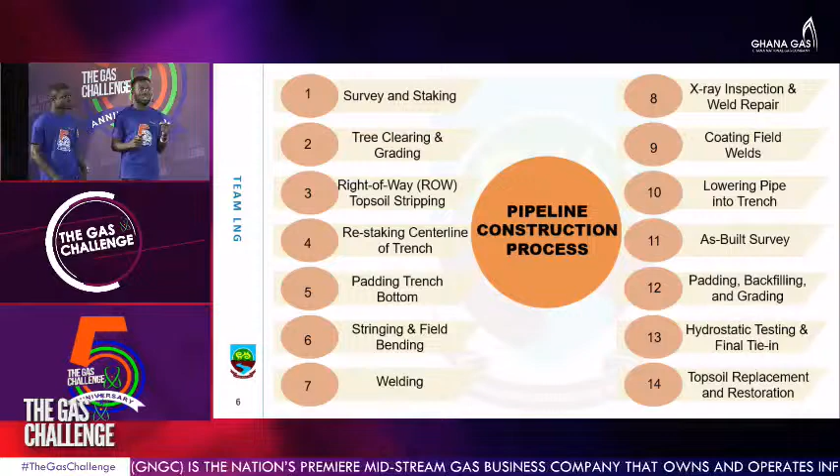After welding, we do X-ray inspection to ensure the integrity of our welding. Sometimes you might finish welding and realize there are leakages, so we do the X-ray inspection to ensure there is no leakage. After that we coat it, because since we joined the pipeline sections together, we have to ensure that portion is also coated to prevent corrosion.

After that, we lower the pipeline into the trench. But before we cover it, we do what we call an as-built survey, done for documentation and future reference. After that, you bury the pipeline and restore the terrain to its natural state. If you don't do the as-built survey, you might not know the exact location where you buried your pipeline.

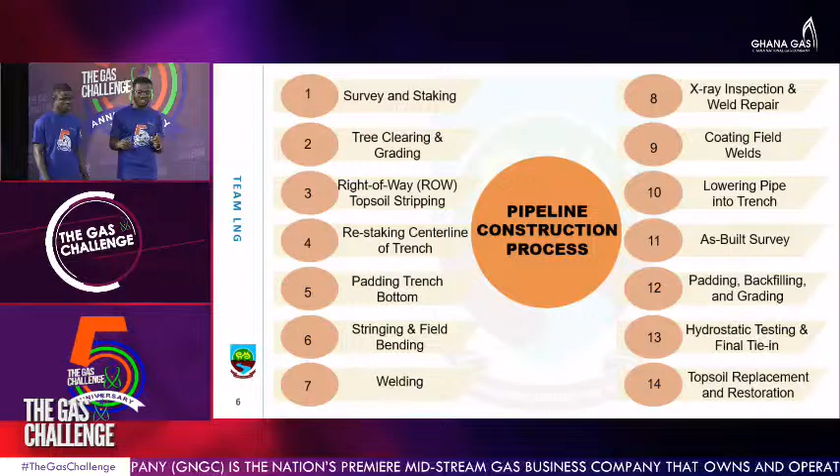This is done using GPS, so we are able to find out the exact location we buried our pipeline for future references. With that, we do our padding, backfilling, and grading. This is done by ensuring that our pipeline is finally covered. After we are done, we do what we call the hydrostatic testing, and then finally we tie into the network.

The hydrostatic testing involves using pressurized water to allow it to flow through the pipeline at a very high pressure, beyond the design pressure of the pipeline, so that any leakage along the pipeline will fail at that pressure, and then that leakage will be mended before we cover it up.

So when we are done with everything, we do the topsoil before we tie it into the network. We do the topsoil replacement and restoration, where we kept the topsoil to ensure that the surface that we extracted regains its fertility.

We come to the specification. These are the dimensions and standards in ensuring safety of our pipeline. We have the pipe thickness to be 5.68 millimeters, but this is the thickness we are using to construct our pipeline. However, there are terrains we will encounter along the way which might require us to add to the thickness, to ensure that stresses exerted on the pipeline don't lead to situations like upheaval buckling, which might rupture the pipeline in operation and result in downtime. We have the pipeline diameter to be 12, the pipeline length 10 kilometers.

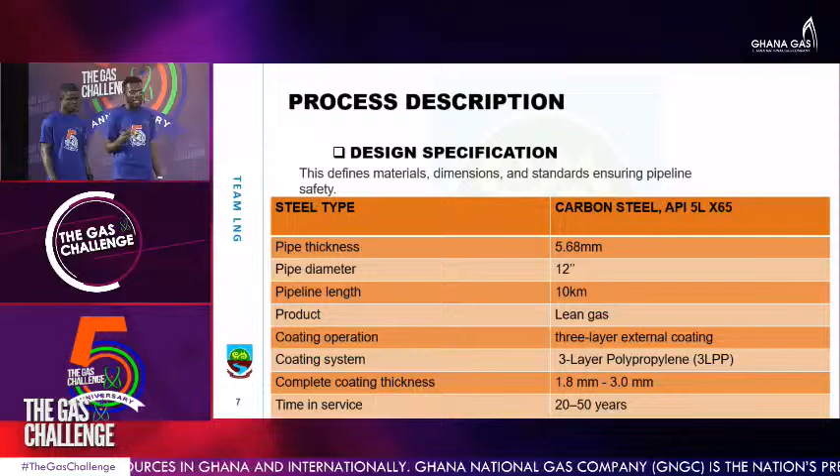The product we are to transport is lean gas, and we have the coating operation to be 3-layer external coating. The coating system is what we call the 3-layer polypropylene, and we have the design service life to be 50 years. Process description: we have the safety system.

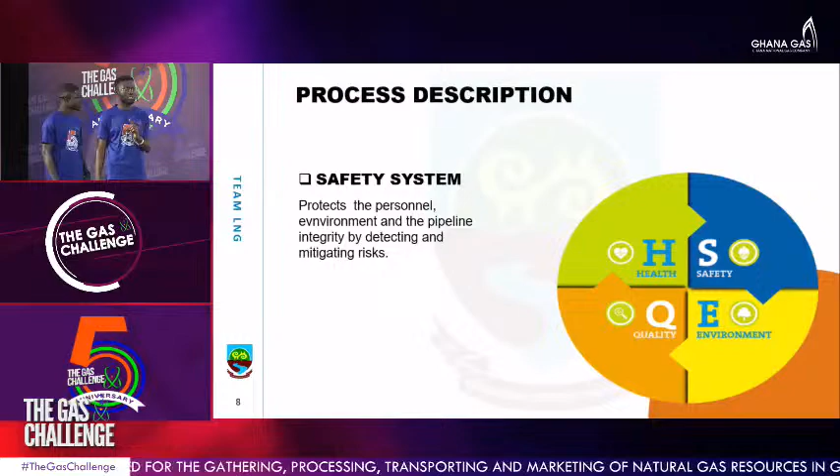The safety system consists of equipment which detects risks and executes mitigations. When it happens like that, it protects the personnel on board who are working from hazards or risks. And again, it protects the environment from hazards while ensuring that the pipeline integrity and stability is also safe. That is why we have this equipment installed.

We have the control system. This system is used to measure the operational parameters and ensure that they are within range. So when we measure these operational parameters to ensure they are within range, it increases our operations, that's optimal performance of our pipeline.

We have the metering package. This metering package ensures the qualitative and quantitative measurements of our pipeline. If I say qualitative, it means the constituent we are transporting, is it actually having what it's supposed to have, the percentage? Is it low or is it beyond? And when I talk about quantitative, I'm talking about the volume we are supplying. Is it up to standard or not?

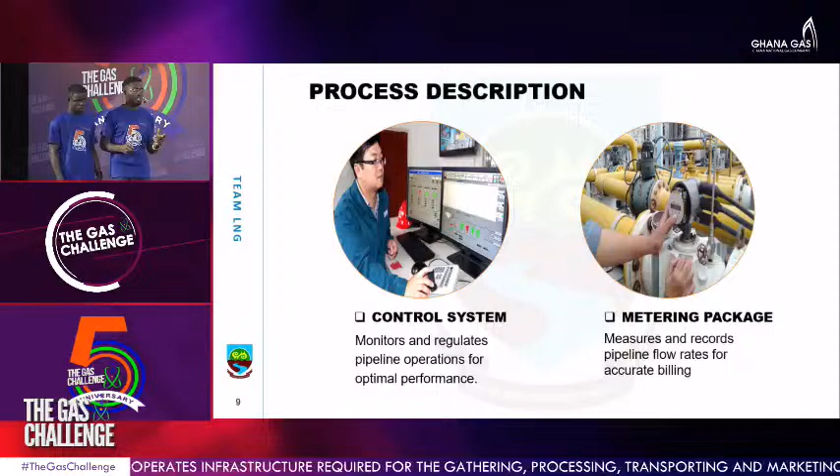So we have the lean gas metering package consisting of the flow meter. It is skid mounted. And then we have ladders and platforms in order to ensure operational accessibility, in case you want to do any maintenance, you can access it.

Then we have the pressure control valve. In this case, we prefer a globe valve to be used as our pressure control valve. The globe valve has a design pressure of 85 bar, and the inlet pressure is 75 bars. And of course, the outlet pressure that we want, because we were contracted to supply gas at 10 bars, the outlet pressure of our pressure control valve, the globe valve, must have an outlet pressure of 10 bars in order to regulate the pressure to that standard. So the outlet pressure is designed to have 10 bars.

And the temperature specification: we have the design temperature to be 30 degrees Celsius, and the inlet temperature is 27 degrees Celsius. We ensure that the outlet also meets the contract specification, which is 25 degrees Celsius.

We have the cathodic protection system. Every pipeline engineer is interested in ensuring that the pipeline installed is not prone to corrosion. So we are employing the cathodic protection system to ensure that the pipeline is prevented from corrosion.

Then again, the 3-layer external coating. The 3-layer external coating consists of 3 layers. The first layer is what we call the epoxy layer, that's the fusion-bonded epoxy, which is the base layer. And the base layer, what it does is that it protects the pipeline.

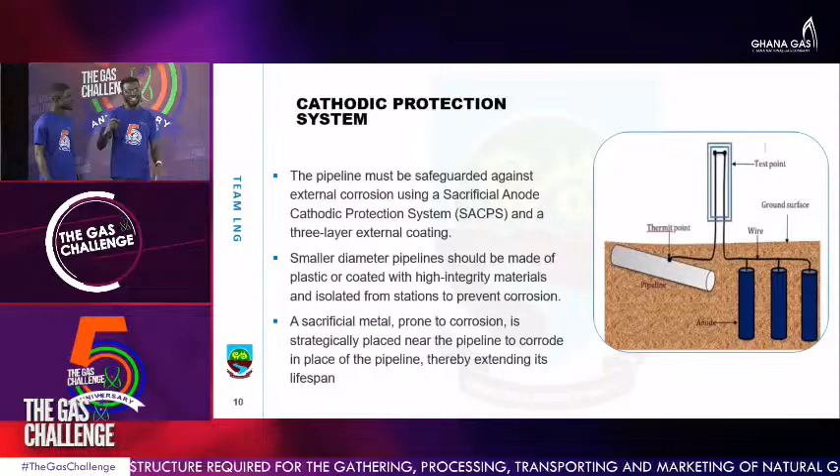Basically, that is the primary function of it, protection from corrosion. We have an intermediate layer, which serves as an adhesive layer to bond the first layer and the third layer, which is the polypropylene layer. The polypropylene layer ensures that the pipeline is protected and highly resistant to environmental factors such as high temperature and chemicals.

In case the pipeline is buried in water and the water is contaminated with chemicals, it ensures that the pipeline integrity is still maintained and operations continue.

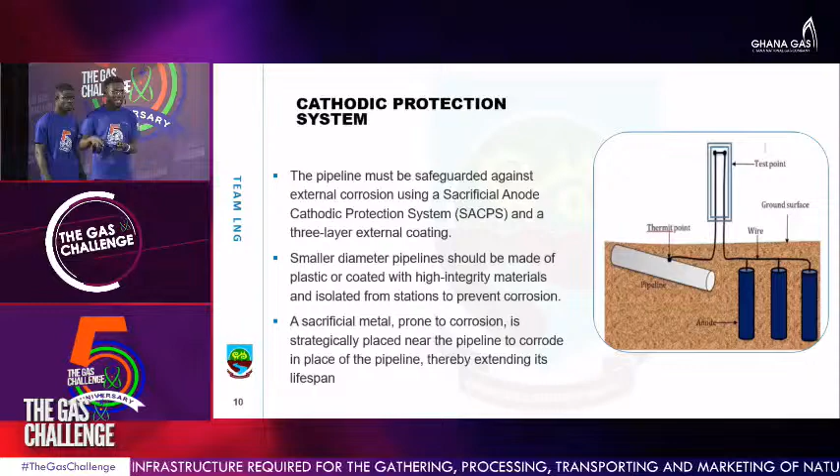Cathodic protection involves installing a metal serving as an anode to an electrochemical system. We connect the anode, which is the sacrificial metal, via cables to the pipeline metal we are protecting, which serves as the cathode. When the anodic metal corrodes, it releases electrons that pass through the cables and transfer to the surface of the pipeline to drive away any corrosion current that might cause corrosion to the pipeline.

We have the pipeline route burial depth. For this slide, I'll talk about the minimum cover from the top of the pipeline, and use the diagram to explain how the pipeline has been moved from one place to another. For the minimum cover from the top of the pipeline, we have the dry land at 0.8 meters, agricultural activities at 1.2, roadways at 1.2, swampy areas at 1.2, and river crossings at 1.2.

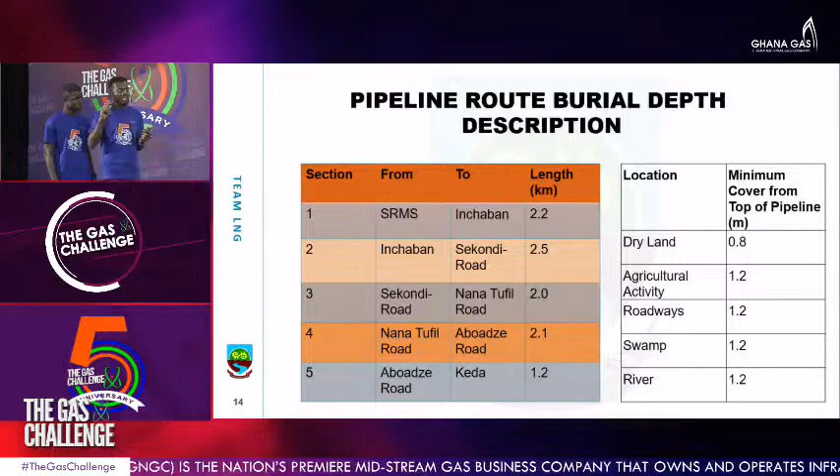These values weren't just taken arbitrarily. We follow the standard code, ASME B31.8, which gives guidelines for the construction of transmission and distribution pipelines. But for roadways, swampy areas, and rivers, we have special codes under that standard we consider. For roadways, we consider API 1102, and for river and swampy areas, we consider API 1111.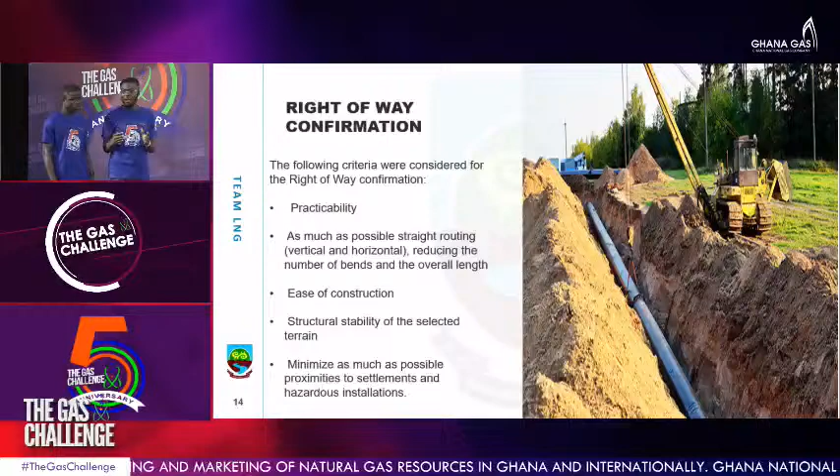Right-of-way confirmation: in confirming our right-of-way, we ensure practicability, and we ensure that the pipeline is as straight as possible. We ensure ease of construction and also structural stability of the selected terrain, and we minimize proximity of the pipeline to settlements as well.

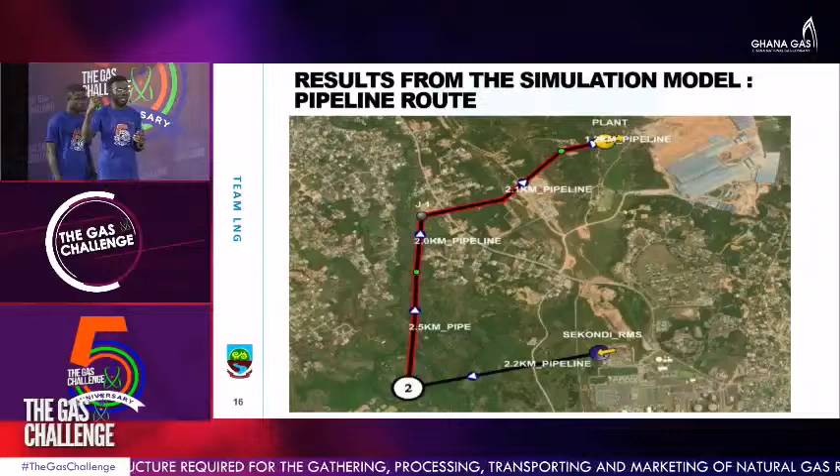This is the result from the simulation model pipeline route. The pipeline starts from the Sekondi regulating and metering station, then goes to Incumbent, with a distance of 2.2 kilometers. From Incumbent, it moves to Secondary Road, a distance of 2.5. From Secondary Road, it moves to Nana to Field Road, a distance of 2.0. From Nana to Field Road, it moves to Abuazi Road, a distance of 2.1. And from Abuazi Road, it terminates at the cocoa processing plant we are supplying gas to, a distance of 1.2 kilometers.

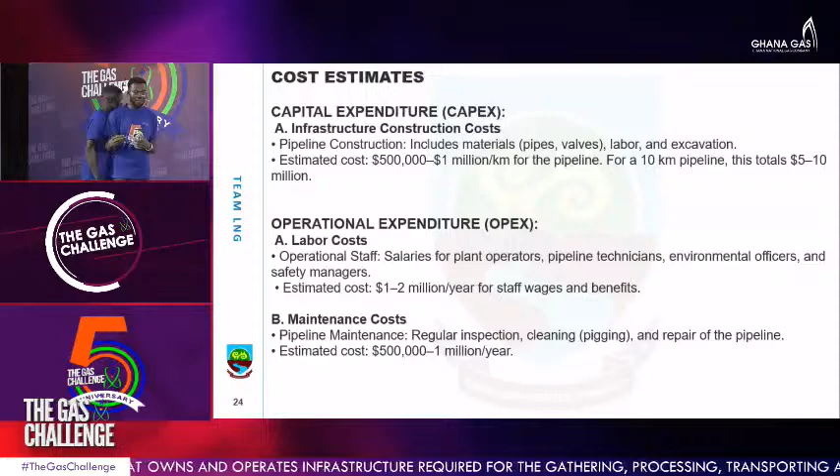Now we have cost estimates. We considered the CAPEX, which involves infrastructure construction costs, meaning the materials bought, labor, and excavation. That cost is estimated to be $500,000 to $1 million per kilometer. So constructing 10 kilometers, the amount rises to $5 to $10 million.

The operational expenditure, OPEX, includes labor costs involving salaries for plant operators, pipeline technicians, environmental officers, and safety management, estimated at $1 to $2 million per year. This is the wages and benefits that we pay to our workers.

Maintenance costs, which is the regular inspection, cleaning, and pigging. Cleaning is done with pigging in our case, and we repair the pipeline, and that is estimated to be $500,000 to $1 million per year.

In conclusion, our pipeline is going to support infrastructural growth in Ghana while supporting the cocoa processing industry. Our technological integration incorporates high engineering techniques and a safety system to ensure efficient operation.

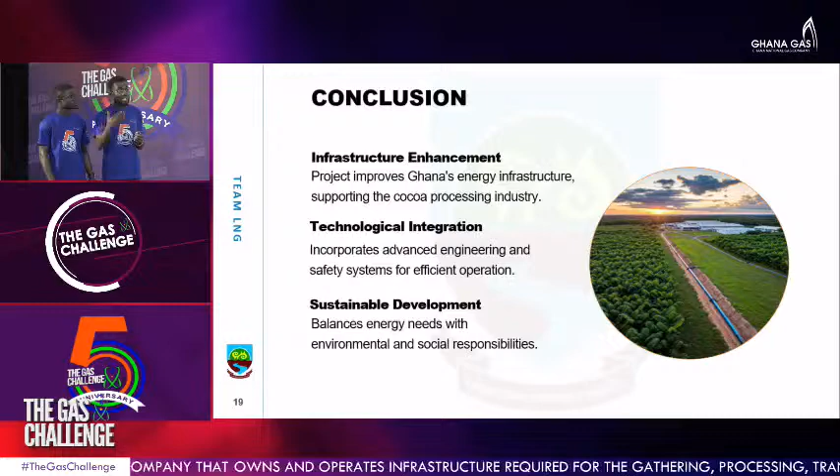In contributing to sustainable development, we have supply of energy in order to balance energy needs with environmental and social responsibility, ensuring that we contribute to the rate at which we consume electricity by depending only on hydro source, but then using natural gas to supply power to the cocoa processing plant, whereby they are going to use the natural gas to generate electricity for their consumption or processing.

Thank you very much. And this is our references, from University of Energy.

Thank you, UENR. So, TaTU — Tamale Technical University.

Team Butane. The power to drive.

Okay, welcome back. I see you have brought a new guy on stage. Can you introduce yourself, please? Yes, please. Good afternoon everyone, my name is Yusuf Abdul Malik, a level 300 student from Tamale Technical University from the automotive department. Okay, so in 15 minutes, tell us all about your engineering design.

The title of my presentation is From Bean to Bar: Building a sustainable gas pipeline to deliver clean energy to Ghana's cocoa processing industry.

Introduction: Due to natural gas's affordability, reliability, and low carbon emission, according to Omer 2008, it is important for energy-intensive industries like cocoa processing, where milling and drying require significant energy. Ghana Gas has tasked us to design and construct a 10-kilometer gas pipeline. This will ensure a sustainable energy solution for Ghana's cocoa processing, also contributing to Ghana's economic growth and environmental responsibility.

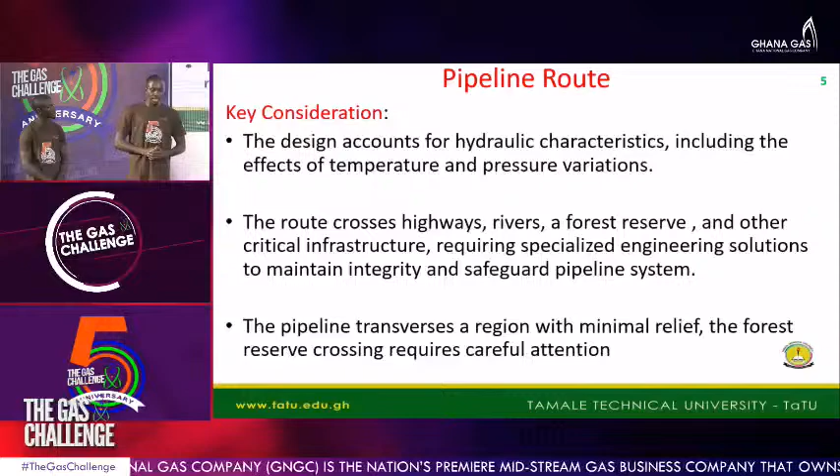Pipeline route: the design will account for the effect of hydraulic characteristics like temperature and pressure variation. The route crosses highways, rivers, and a forest reserve, requiring specialized engineering solutions to maintain integrity and safeguard the pipeline system. The pipeline traverses a region with minimal relief, that is the forest reserve crossing, which requires careful attention.

Pipeline integrity: to ensure the safety of this pipeline, we will apply established industry standards such as API RP 1102, which provides guidance for pipeline crossing, focusing on safety, corrosion prevention, and damage mitigation, according to Joshi et al.

Also, API 1110 is a pressure testing standard which will ensure pipeline integrity and safe operation before commissioning is performed, while implementing automatic control valves and pressure relief devices, according to ASME B31.D, ANSI, and API standards to regulate pressure, temperature, and flow rate.

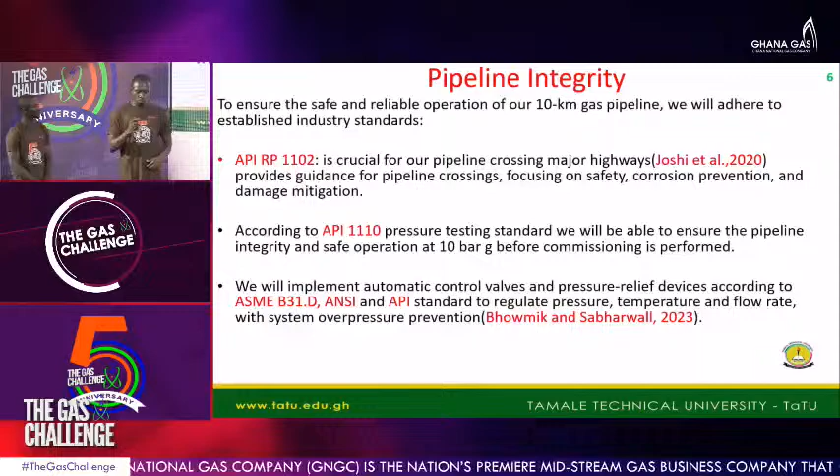Steady-state hydraulic analysis is crucial for this design as it provides insight on how gas flows under normal, unchanging conditions. To analyze this, we will use empirical flow equations, which include the general flow equation and Bernoulli's equation, plus the rest.

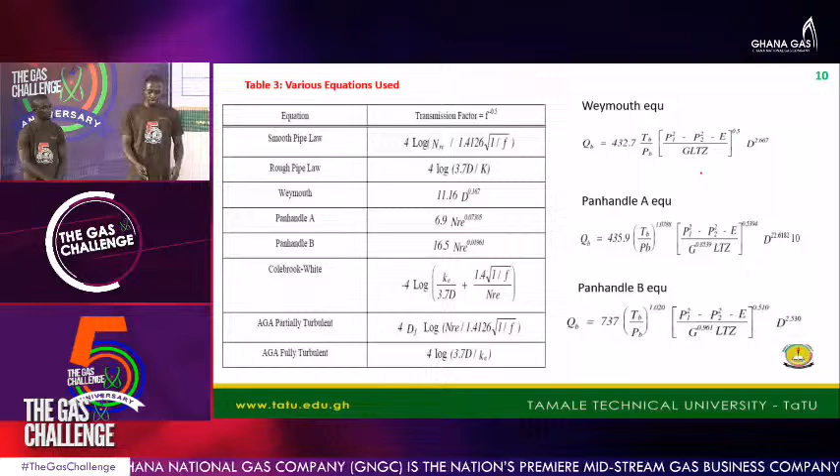Various equations used will be Weymouth, Panhandle A, Panhandle B, Colebrook-White, and AGA equation, and all will involve transmission factors. If you look at these equations, all the alphabets in them have the following meanings.

The Weymouth and Panhandle A and B equations will be used in calculating the sizing of the pipe, whilst the Colebrook equation will be used in calculating pressure drops in the pipe. AGA equations are important for calculating an accurate flow rate within the pipe.

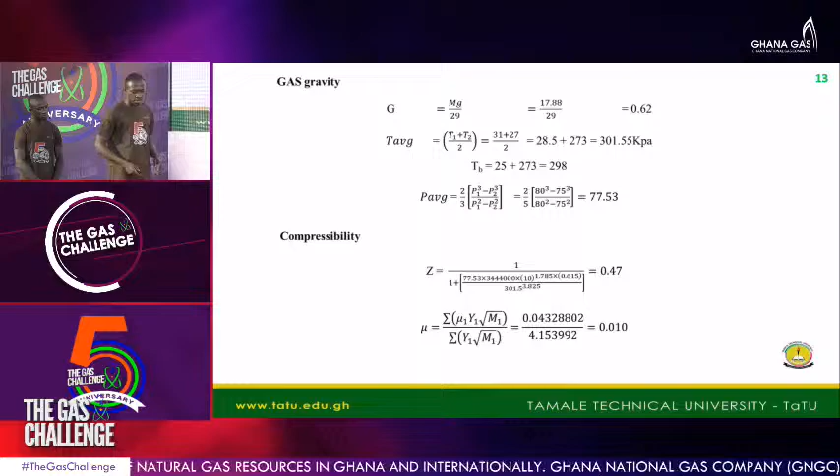Gas gravity, as proven, was 0.62 and the compressibility factor was 0.47.

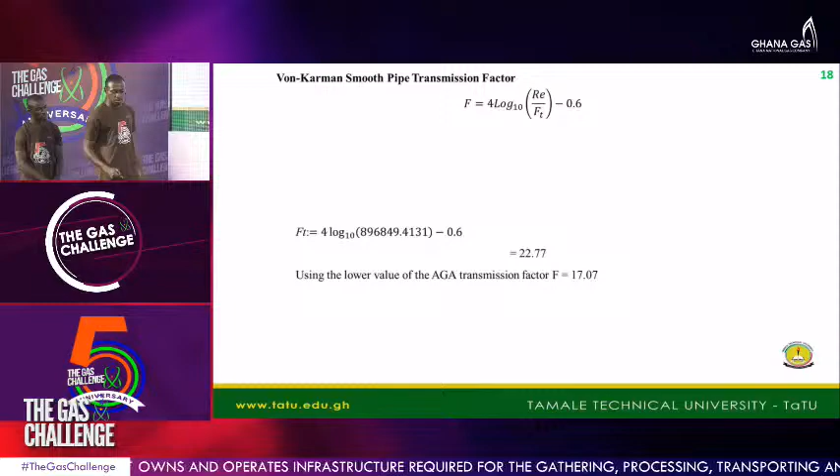Panhandle A equation gave us a diameter of 17.96 inches, and Panhandle B gave us a diameter of 11.26 inches. The AGA equation gave us, by inputting a transmission factor from turbulent flow, partial turbulent flow, and Von Karman smooth pipe transmission factor, we chose the lower value of the AGA transmission factor, which is 17.07, and input it into the general flow equation. That gave us a diameter of 12.39 inches.

The Weymouth equation gave us a diameter of 12.41 inches, and the Colebrook-White equation gave us 12.27 inches. Summary of the minimum inside diameter required: from AGA and Colebrook-White, you can see that 12.41 inches to 12.27 inches is the estimated nominal diameter of the pipeline.

Whilst Panhandle A gave us a diameter of 17.96 inches, Panhandle B gave us a diameter of 11.26 inches.

This is a type of pressure safety valve at a residential area. As our pipe will be traversing through a densely populated area, this is a safety valve to pay attention to.

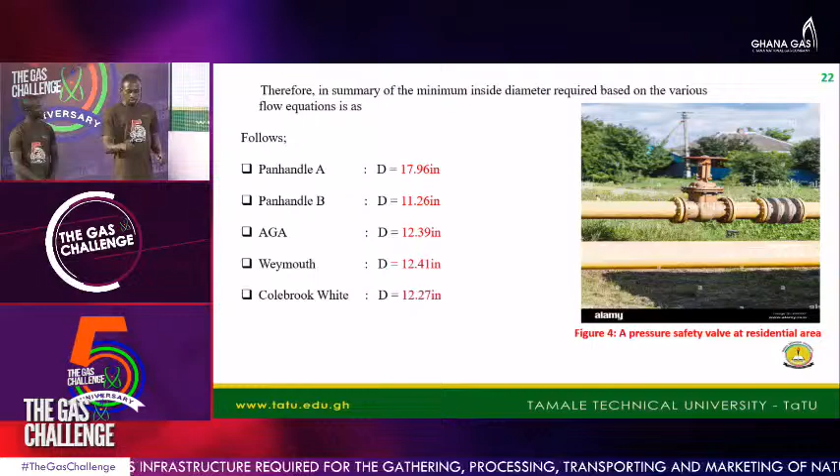A look at project expenses: the cost per inch diameter mile of a pipeline is $15,000, and approximately a 10-kilometer length is 6.2 miles. The estimated cost of the whole 10 kilometers will be $1.1 million.

Pipe material cost for an NPS 12, because the AGA equation and the Colebrook-White equation gave us a nominal diameter of 12 inches, we use NPS 12 as our estimated pipe diameter.

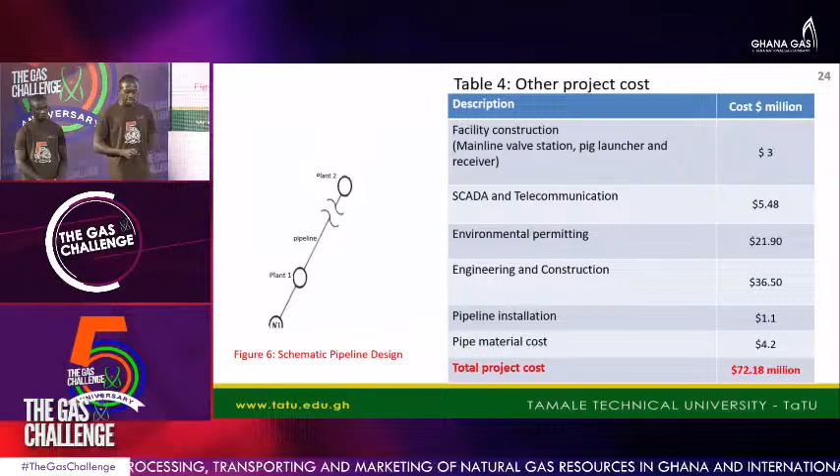Other project costs will include facility construction, mainline valve station which includes a pig launcher and receiver, SCADA telecommunications, environmental permitting, engineering and construction, plus installation and material costs, which gave us a total project cost of $72.18 million. This is a schematic pipeline design from Plant 1 to Plant 2.

Options, assumptions, and considerations: we will use other alternative materials like polyethylene and stainless steel to maintain corrosion resistance and potentially reduce cost. Also, a pigging system will enhance efficiency and safety within this pipeline.

Key assumptions are that gas composition will remain constant, and flow rate and pressure will be under steady state conditions. Major considerations are that safety will be prioritized throughout all project phases, as it is our first value. Minimizing environmental impact through route selection, erosion control, and regulatory compliance is also crucial. Open collaboration with local communities and stakeholders will be essential, along with prioritizing acquisition of all necessary permits and approvals.

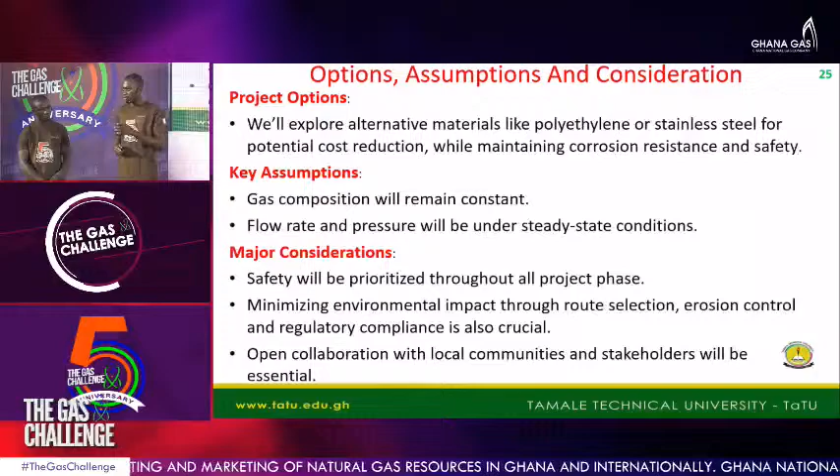In conclusion, while pipeline projects offer economic benefits, we should keep in mind the impact on sensitive ecosystems, such as habitat destruction, water contamination, and loss of biodiversity. Implementing a comprehensive environmental assessment, minimizing project footprints, and reforestation programs will improve water quality and contribute to both the economic benefit and ecological integrity of Ghana. Thank you.